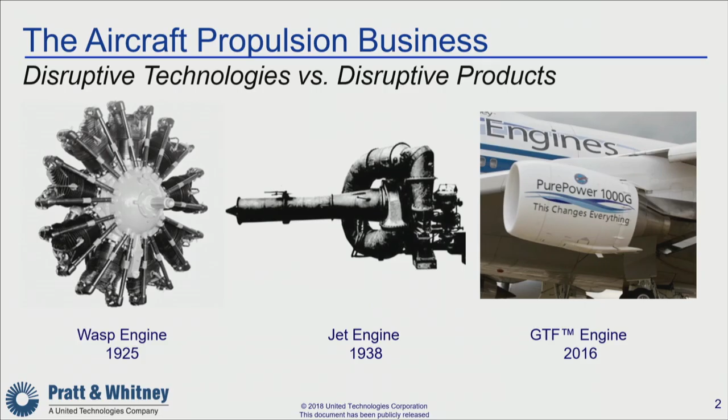This is Whittle's jet engine in '38, and von Ohain's in Germany - those are disruptive technologies that basically disrupted the piston engine business over the following 10 and 15 years. Most recently, the Pratt & Whitney family of geared turbofans has some new technologies in it, but it's a disruptive product in that it forced the industry and the competitors to come out with new products that answered to this.

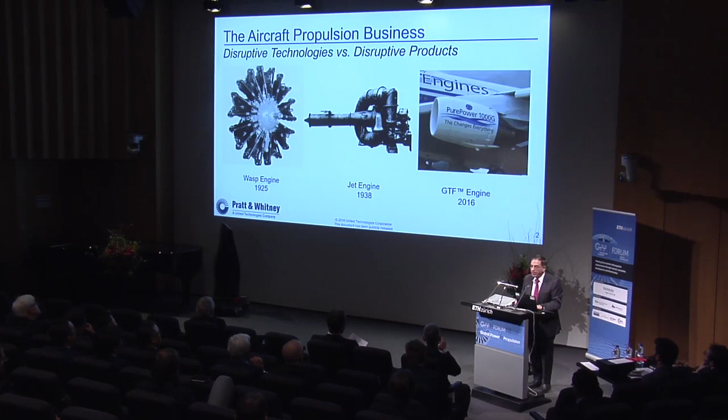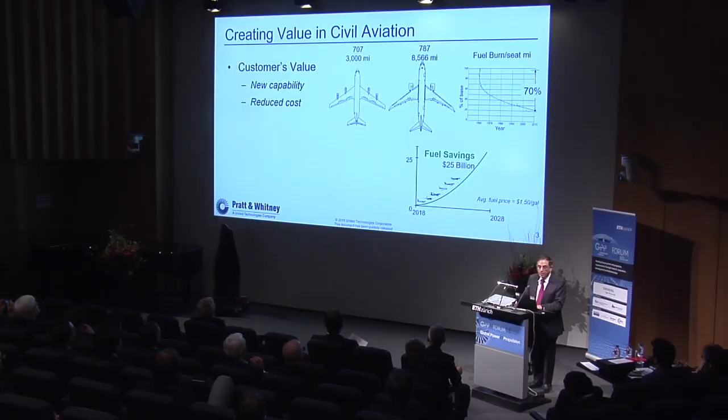And of course what it's all about is trying to create value. In aviation, there's my customer's value, which would be the airline or the airplane manufacturer. Here are two airplanes, the 707, the first successful commercial jet, and a newer one, the 787. If you're not an aviation person, they sort of look the same from the top - just a couple, one has two engines, one has four. But one is 70% more efficient per passenger kilometer than the other.

That's the result of enormous technology investments over 50 years, and new capability too. There's a lot of capability in the fact that I live in Boston and can fly Boston to Peking, Beijing, or Shanghai, now direct, nonstop, where we couldn't before - so that opens up new areas. And the fuel economy of things like the geared turbofan is worth about $25 billion to the world's airlines in reduced cost over the next decade. So it's been very successful.

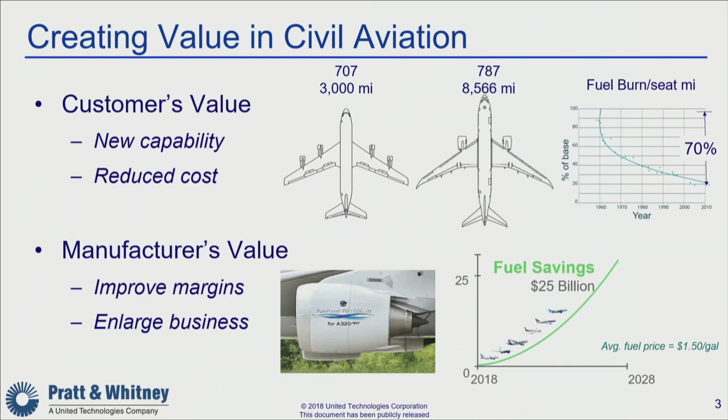But from the point of view of my management, they don't care about that stuff. They want to improve margins for their investors, or they want to enlarge the business. It's really no different than any other business. So let's first consider how peculiar the commercial airplane engine business and airplane engine business is.

Consider it's an extremely long-term business. We talked about infrastructure, which is there for many decades - aviation engines are also there for many decades. The J-57 started development in 1949, went into service in '54, and it's still in service 70 years later. It will be in service for another 10 or 20 years, generating revenue during that period.

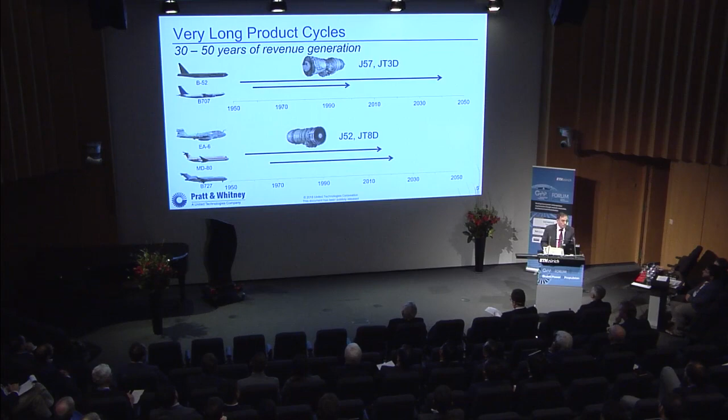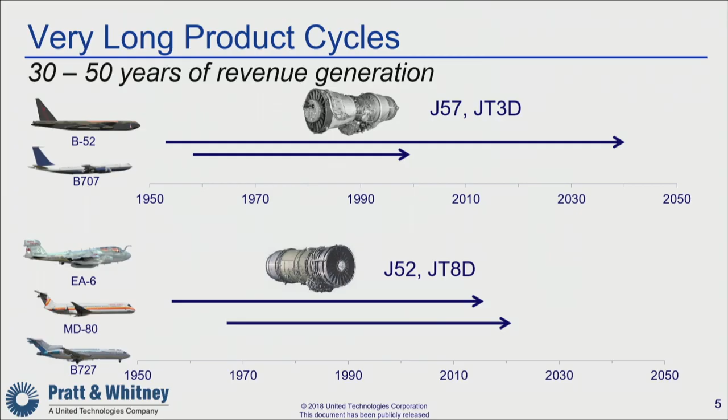Another engine was the J-52, which became the JT-8D, originally for a missile in the '50s, then a fighter plane, then the 727s and MD-80s. There are still a couple of thousand of them flying many years later, generating revenue. In fact, close to 40 years after they were introduced, at the turn of the century, those particular engines were the largest revenue stream in commercial engine aviation. So these are very long-term investments if they're successful. If they're less successful, they disappear, and we pretend they weren't there to begin with.

Engines have public list prices published by asset managers and leasing companies. They're basically commodities sold per pound of thrust. $200 to $300 per pound of thrust is a typical price for an airline engine.

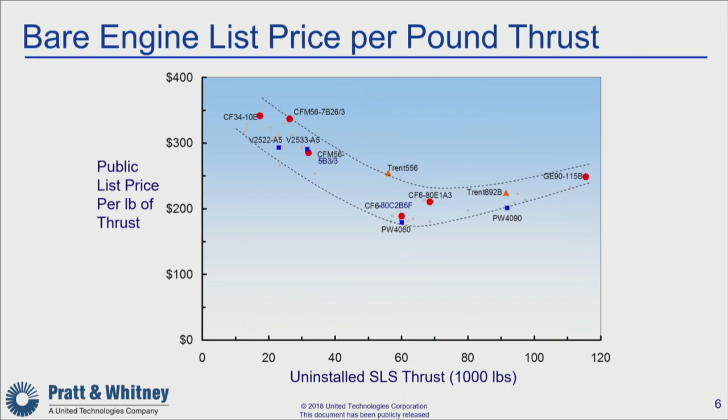We can go over why the curve looks like it does, but that's a constraint. Airplanes are sold per pound of capacity, gross takeoff weight, as certified.

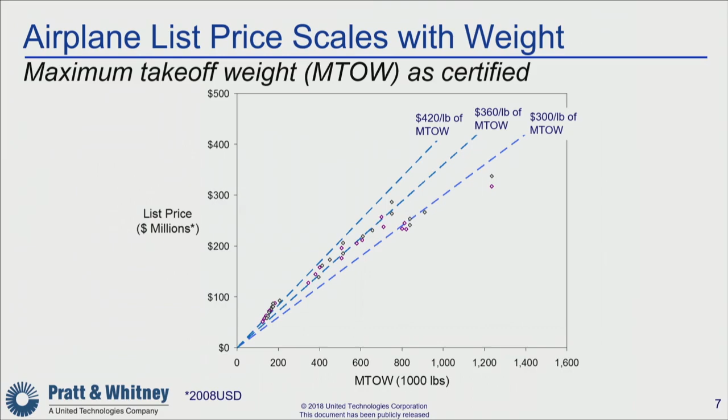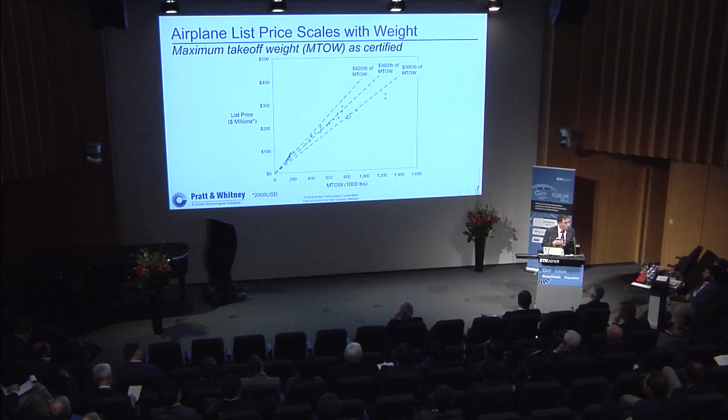If you want an airplane with less gross takeoff weight than it can deliver, the airframer will sell that to you at a reduced price and give you a certificate that says you can only operate that as a reduced takeoff weight airplane, and we'll sell you engines at reduced takeoff thrust, certified for that reduced takeoff thrust. If a later purchaser wants to buy that airplane and increase the takeoff thrust or increase the gross weight, they actually have to go and pay the engine company and the airframer to do that. In the old days, it was putting a plug in to tell the engine that it was now more beefy. These days, it's a software download, but it's connecting value to money.

Now, if I plot these two together, the vertical axis is the list price of the engines, the airplane list price is horizontal, and yes, they're both sold at discounts, but the ratios are about right. What you see is the engines are about 20%, 18 to 20% of the value of the airframe.

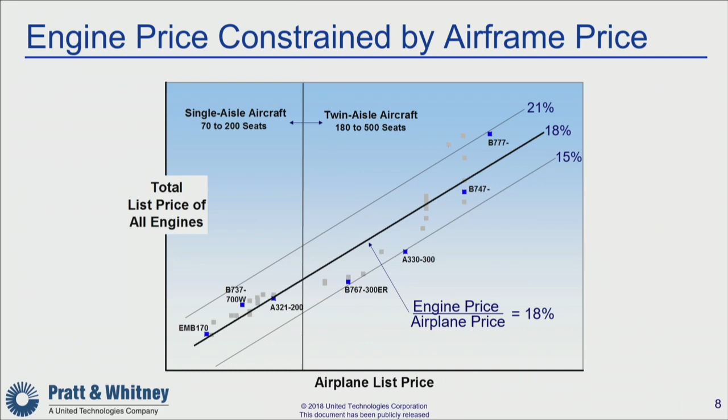That's a constraint, because what I find is my airframe customers don't want to pay me any more for my engines. They're basically saying they're willing to let on the order of 20% of the value go to the propulsion provider. If they can negotiate me down to 18 or 17%, they got a great deal. If I can negotiate them up to 22%, I got a great deal. But that's the business part of it.

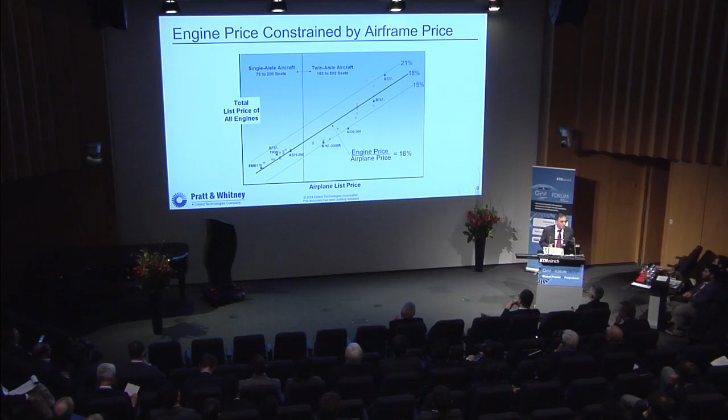It's a key point, because what it says is, as we develop new technologies, they can't add to the cost of the product. So for every new technology that adds cost, I need a technology that takes cost out, because I can't sell the engine for any larger fraction of the airplane.

Now, for narrow-body airplanes, since the 727 in the early 60s, the cost of operating the airplane in corrected dollars has actually come back down by 40%. That's the value generated by the design technologies for the engine, airframe, avionics, as well as manufacturing technologies.

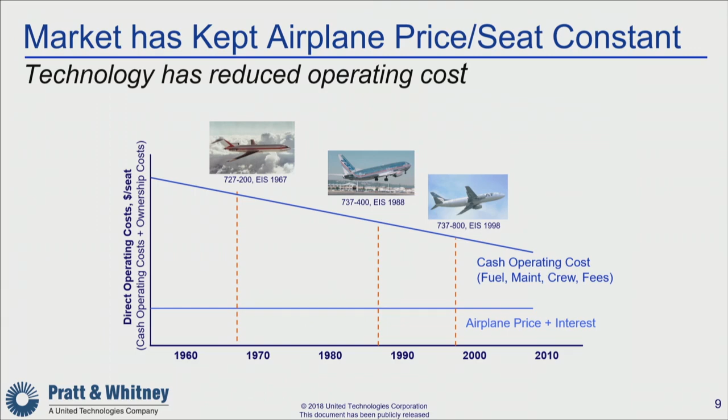Now, that's the good part. The bad part for manufacturers, the selling price hasn't budged. So it's much less expensive to operate for the airlines. We're not generating any more revenue for the manufacturers.

What's going on is, the airlines weren't generating large profits either for many decades. They were giving it away to their passengers, so airfares dropped by an order of magnitude since 1960. And so we took it out by growing the size of the market enormously, and it's continuing to grow at about 5% a year.

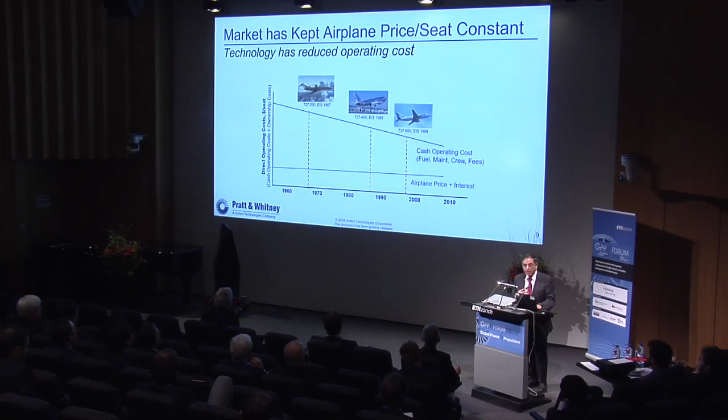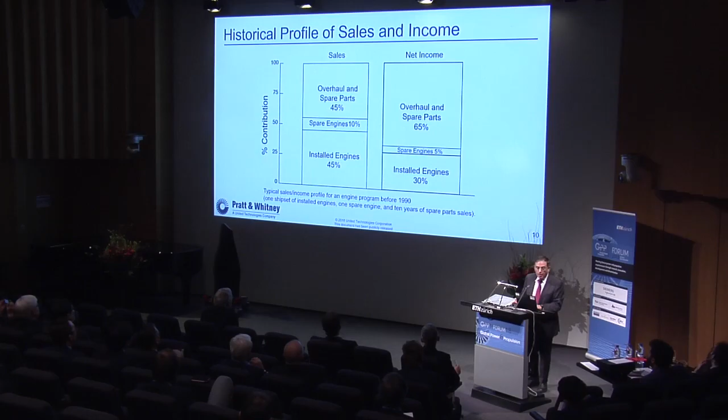But that still doesn't address my business concern of how do I increase the returns and the margins in what I do. Historically, say before 1990 certainly, the business selling commercial jet engines was about half the engines went as new engines on new airplanes—45%, 10% were spares, and overhaul and selling spare parts was 45%. So it's about equal, installed engines on airplanes and overhaul.

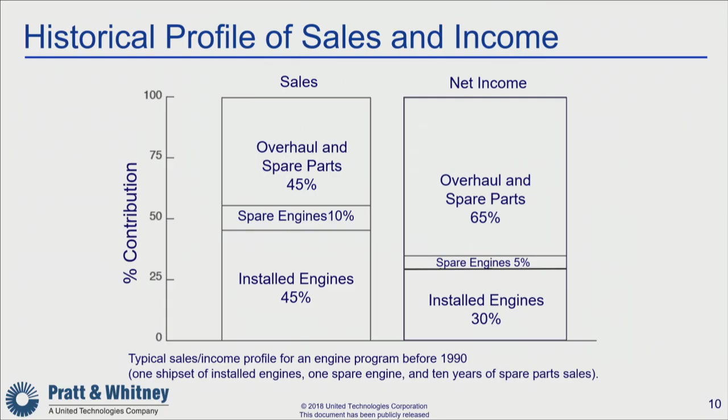But the net income was much more profitable to overhaul and provide spares than it was to do installed engines. That was prior to, say, 1990.

Now, it's changed quite a bit. We make no money selling engines. Actually, on a good year, we make no money selling engines. All of the net revenue comes from overhaul and spare parts, which has a profound effect on how you think about new engines.

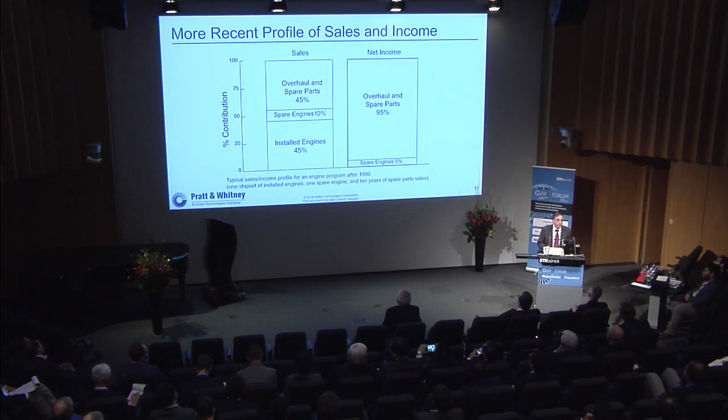In the good old days, here's what an engine development looked like. If I had to go to my banker and borrow money to invest in the engine, I'd ask for about $1 billion for a small engine, for engineering development over the course of 5 years. And then, because the first engines are usually very expensive to make, we haven't learned how to do it yet, we're losing some money further on, but then we start making money both on engine sales, and then as the engines come back for spares, we make more and more.

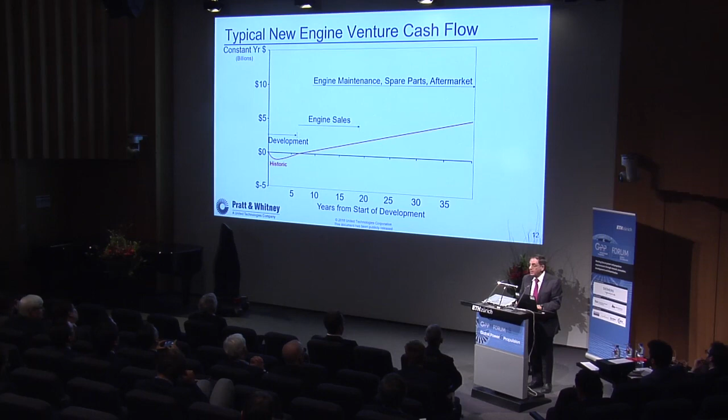And you could argue over the shape of those curves. Some of them go up almost exponentially. Some of them abruptly die. That was the old days.

Now it looks more like this, because we're not making money on selling the engines. We're putting billions of dollars into engineering development. We're putting billions of dollars into capital. We're putting billions of dollars into early sales concessions versus the manufacturing cost. We lose money for about 25 years.

Now, I see our investor here has a very sick look on his face.

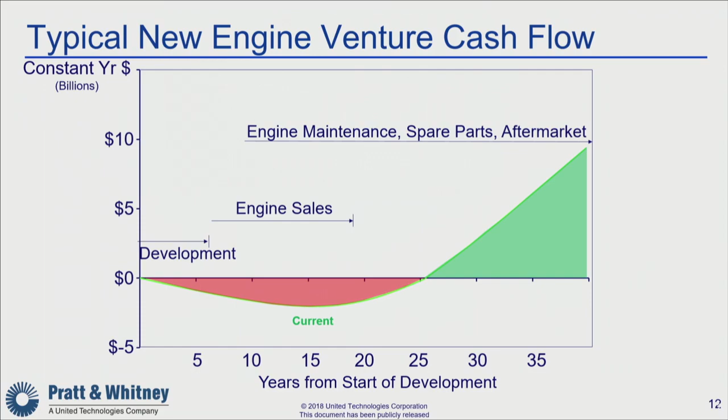For our newest engines, the official number from our CEO is we're down 11 billion, but then it goes very positive indeed. So investors really like the green, but not so pleased with the red. What's been happening is the red's been getting bigger and deeper as time's gone on over the last 20 years, and people are starting to ask, do I really want to invest in this business, and how do I change this investment strategy? Because even for the die-hard older academics here, if I gave you 11 billion dollars to invest up front, you might find better paybacks than 25 years.

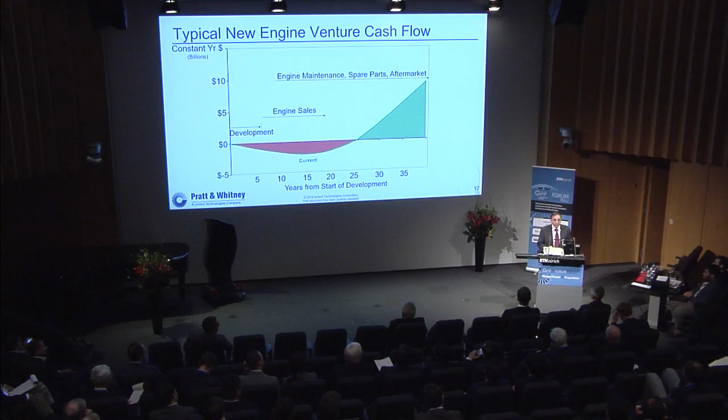So we're looking for things that are new, we're looking for things that are innovative, we're looking for disruption. But we also have to be mindful of evolution.

A technical meeting like this, we talk about technical stuff. Here's an excerpt from the Mechanical Engineering magazine in 1945 on the jet engine, and they talk about all the interesting things they have to work on: high-temperature alloys, high-speed bearings and bearing resonances, distortions due to temperature, compressor and turbine designs, aerodynamics, structures. Funny that those are all the things we work on still today, and those are, to a large degree, how we've gotten the 50% improvement in engine fuel burn over this period.

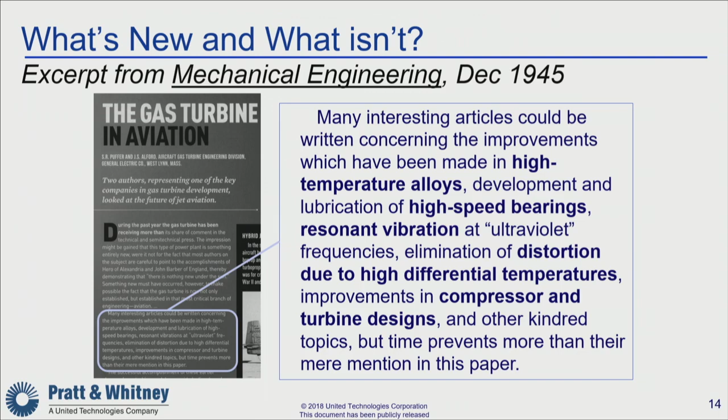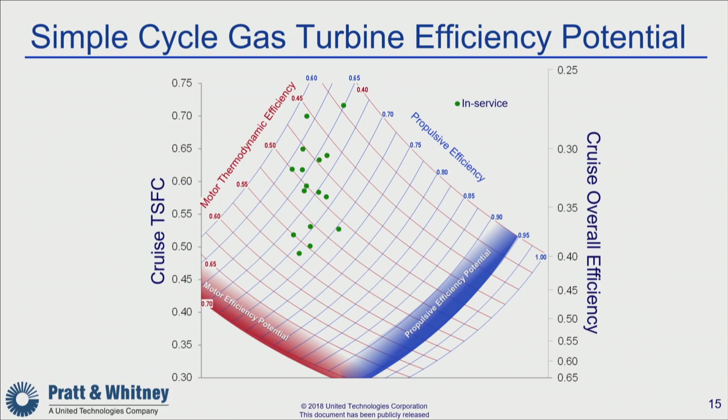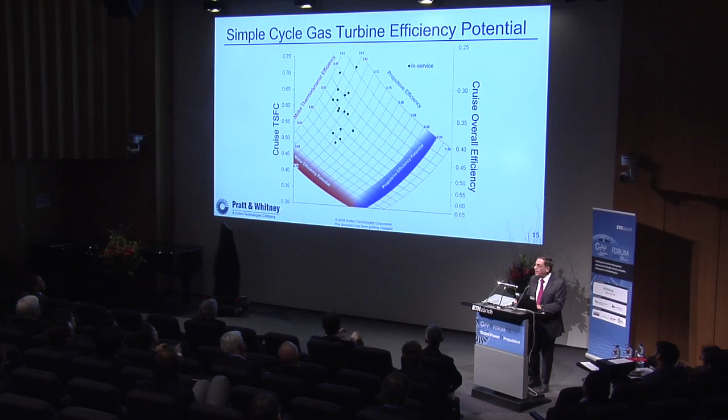Historically, we know we're working to reduce fuel burn. The 707 was about 20% overall efficiency, the newest engines are a little over 40, and we think the ultimate is on the order of 60 or so. So there's as much headroom to improve engines as there has been in their total development. That's one evolutionary factor, perhaps, although we may need innovation, certainly need innovation to get there.

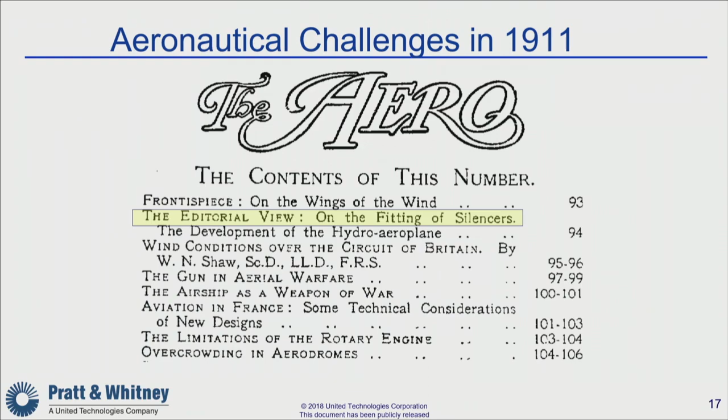Here's a British magazine from 1911, with an article on the fitting of silencers to airplanes, stating they think the racket doth prejudice the public against us. I flew through Heathrow yesterday, and we know they're still holding that grudge from 1911 in terms of the British aeropress. So for the history of jet engines, we've worked hard to reduce the noise.

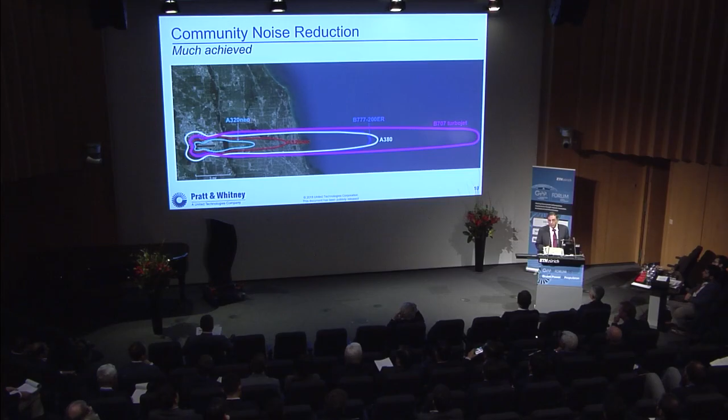I was just talking to the noise group at O'Hare. They got 224,000 noise complaints in the last quarter of last year, because it's now all automated. So we still haven't quite solved that problem.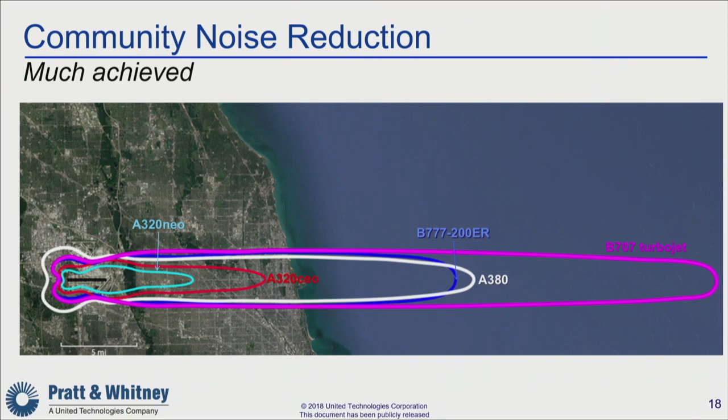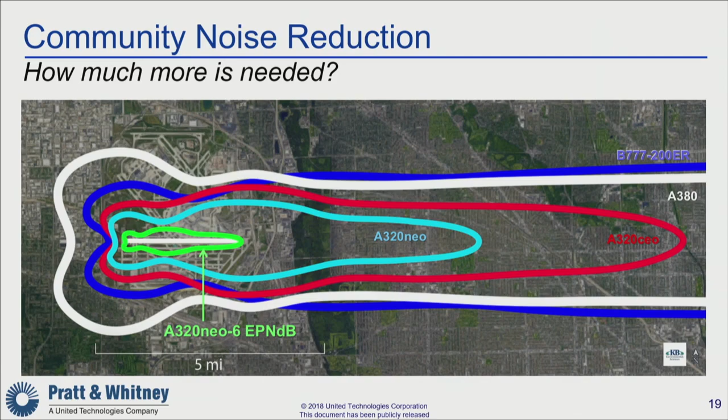You could ask from an engineering point of view, how quiet do you have to be? We've done that calculation. If you can take 6 EPNdB off that class of airplanes, you can keep the 75 dB noise contours over the runway. Now, 6 dB, as you know, is a factor of 2 in noise. It's a very non-trivial number, which you'll probably never get from an existing design, but it's not the numbers I'm used to thinking about, 30, 40 dB.

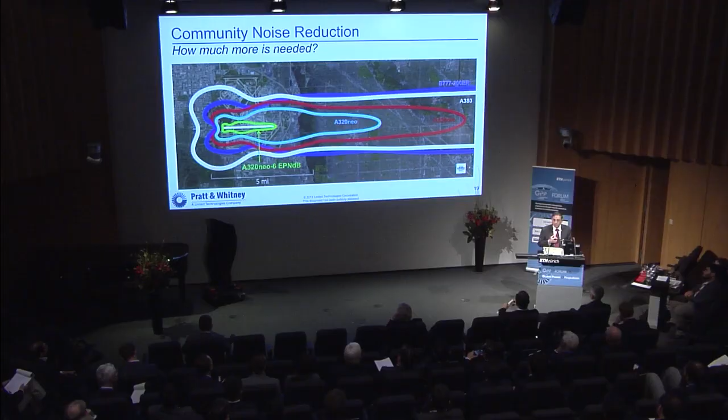It's also, for the Neo, the engines are only a dB quieter than the airframe on takeoff. So you quiet the engines, you still have to work on the airframe, but that's not my problem. That's the airframers' guys. They will no longer be able to submarine behind the engine people on noise complaints.

And indeed, in an evolutionary sense, at Pratt we're working on advanced propulsors that have much lower noise and much lower fuel burn, suitable, say, for a 2030 airplane. There's one at a NASA rig, same one on a full-scale engine. Of course, the development for the technology has to precede by 5 years the engine development we do.

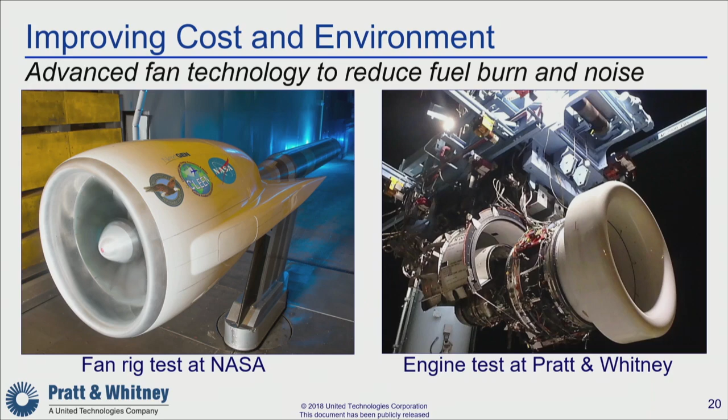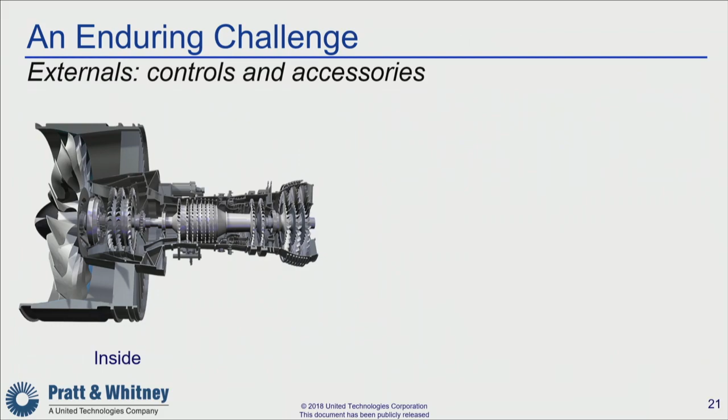One thing we don't talk about in meetings like this is controls and accessories. This is the picture of the inside of a jet engine, very familiar to you all, with blades and combustors and discs and all that good stuff. But the outside of the engine is festooned with controls and accessories.

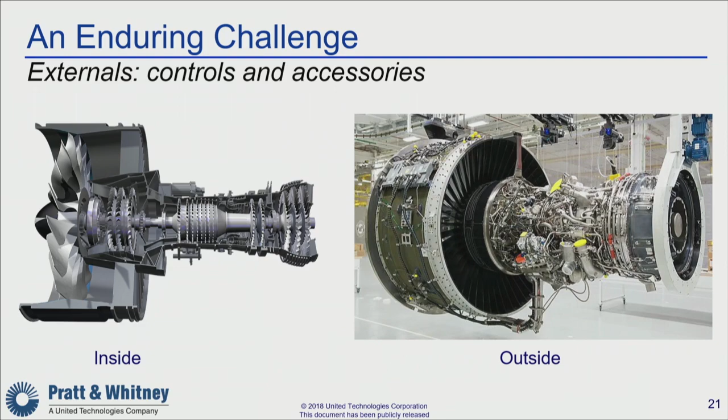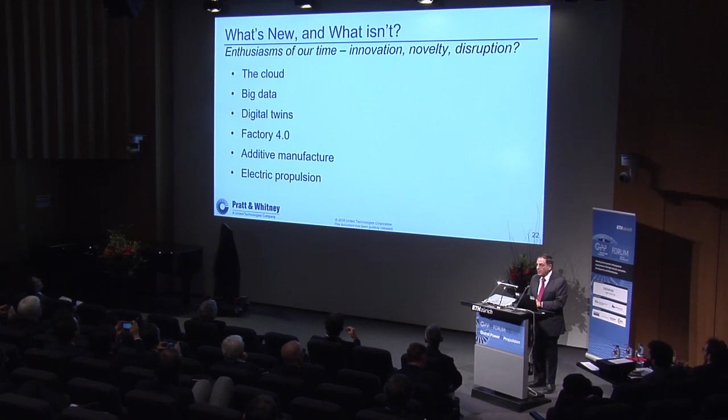So the enthusiasms of our time, I get clippings from our CFO and chairman on what are we doing on the cloud, big data, digital twins, factory 4.0, additive manufacture, electric propulsion. And since they control the money, you actually have to answer them.

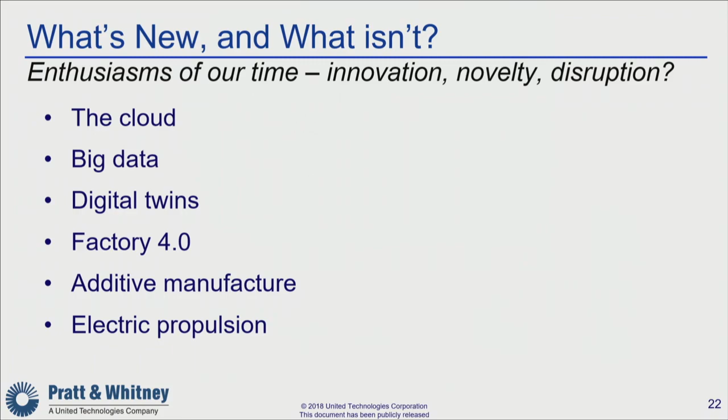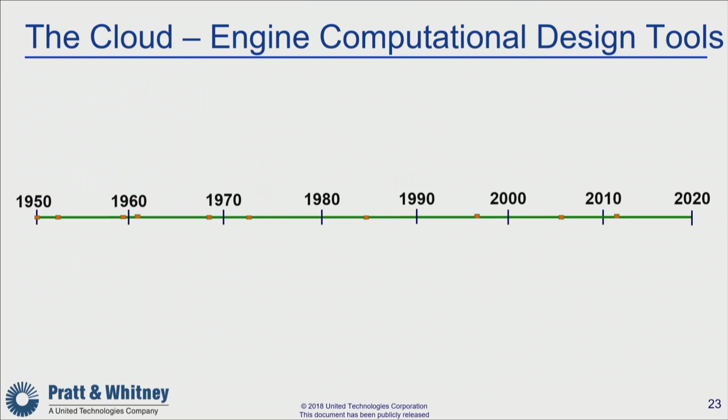Let's talk about the cloud in the sense of engine computational design tools, a topic that many in this audience are extremely expert in. In 1950, that J57 was designed with slide rules and mechanical calculators.

In 1960, the J58, the engine on the SR-71, was still designed with slide rules, although we had tube computers then, which filled large spaces. Some of them we still have.

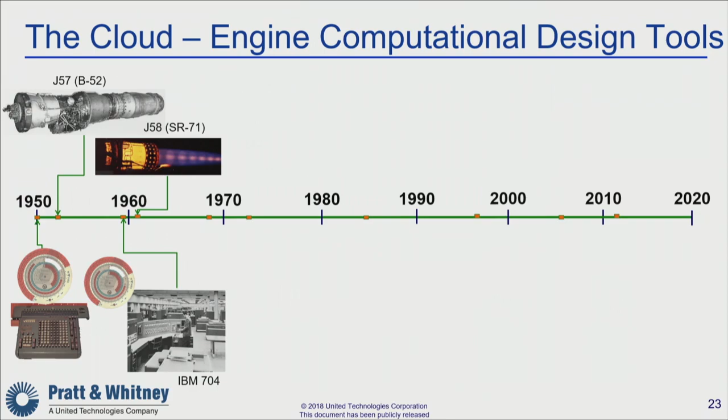Go forward a decade, and we had the IBM 360-65, which some of us went to school on, and that was used to design the first F-15, F-16 engines.

By the middle 80s, we'd gone to a Cray, and that $32 million Cray was Pratt & Whitney Engineering's pride and joy. People just used to look and admire it, much less finagle how to get computer time on it. And that designed a much-improved engine.

My iPhone has 100 times the computer power of the Cray XMP, by the way. It doesn't cost $32 million, although Apple's certainly making a fortune much greater than that than Cray ever did, so there's a message there perhaps.

F-22 engine, the F-119, Crays weren't enough. We used 1,000 workstations networked together.

That latest airplane is the F-135, the F-35 engine, F-135. That was designed with a cluster, a cluster with tens of thousands of nodes in it, growing all the time, still growing all the time.

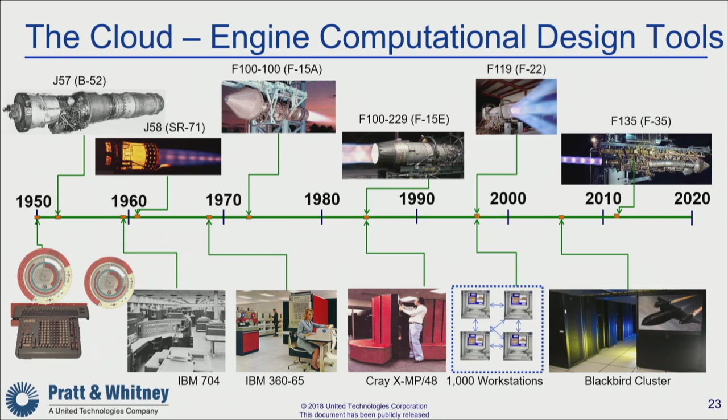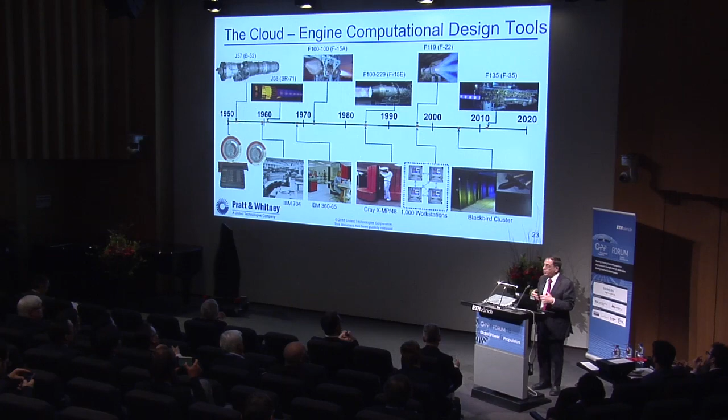In the midst of product development, if we run into, as a professor I'd call it a problem, but here I'll call it a challenge or an opportunity. We have 2,000 engineers working on this project. We have commitments to customers. We want to get it solved ASAP. We're willing to pay almost anything for computer time if the computer calculations will help us move forward.

And so having that expandable capability in a big cloud, which means you need the codes that can do that as well, it has a lot to contribute.

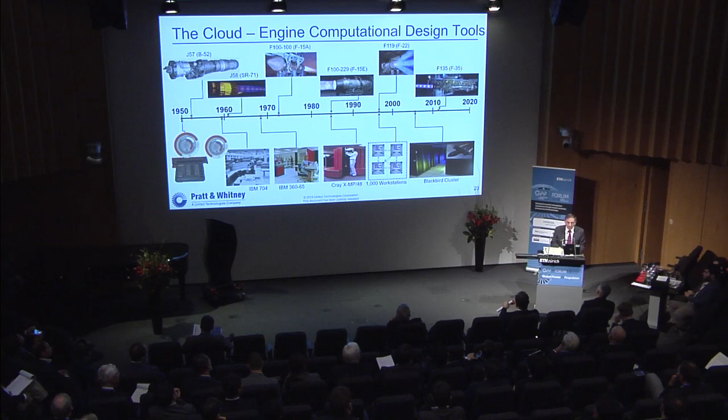Now, this isn't designing the product. We make our money out of engine maintenance.

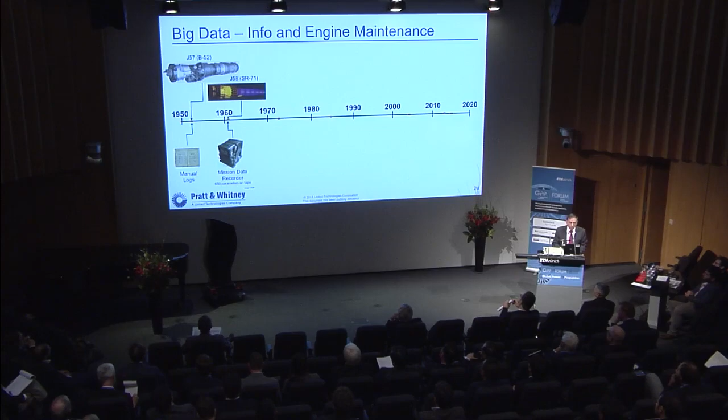So if we go back to that J57, the information for maintenance were handwritten logs. You move forward to the J58 on the SR-71, it had a digital and analog mission recorder that recorded 600 parameters. An astonishing thing for a development that started in 1958.

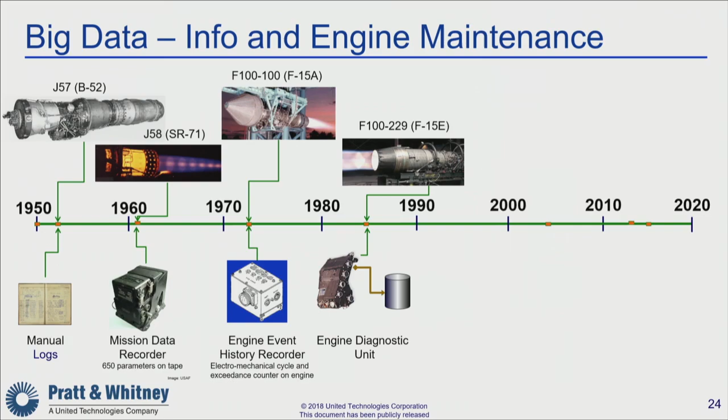However, back to the F-100, that was really mechanical. By the time we got to the 229, now we had a digital computer on board to record the diagnostic units. And these are different than the engine control computers.

And that's because it's very hard to change engine control computer software because it's safety critical. It's much more economical to put it in a separate machine.

The F-119 has 2, and the F-135 also has 2, and it has more computer power in the diagnostic units than it does in the engine control computers that run full state models of the engine all the time.

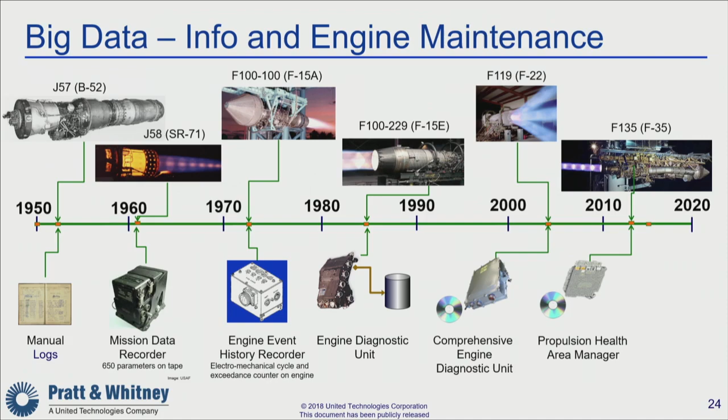And there's something called EFAST. EFAST is a box that now goes on commercial airplanes. It monitors thousands of engine parameters 10 times a second over the entire flight.

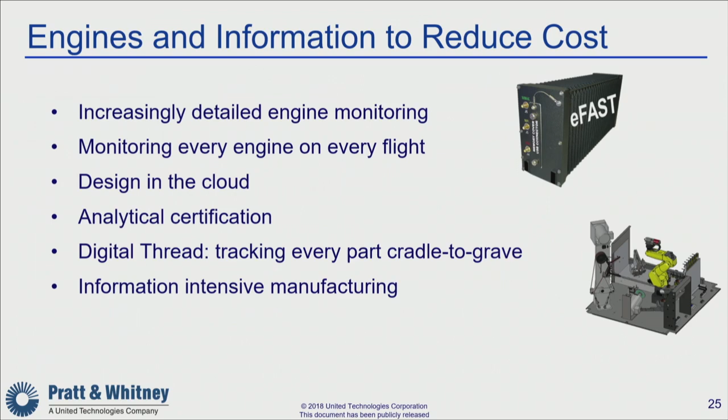And when the airplane lands, it has a cell phone on it. It calls home and downloads the data. Now, you don't do that on a military airplane because you want a secure link, you want to plug things in. But the point is, we're now bringing in an enormous amount of data compared to where we did.

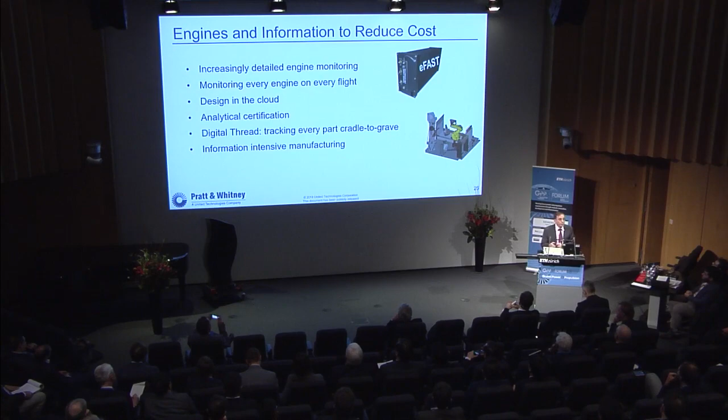We monitor it on every flight. We're moving towards analytical certification. And the other part of the digital thread is measuring all of the parts as they're made and keeping track of which part is in which engine to know how to solve problems.

So, Factory 4.0, what are we doing at Factory 4.0? Well, actually, Pratt & Whitney is a machine tool manufacturer from the 1850s who happened to have some extra machine tools and some empty factory space and agreed to invest in this airplane engine company if it took its name, also used its machine tools and space. That's how the name Pratt & Whitney came about.

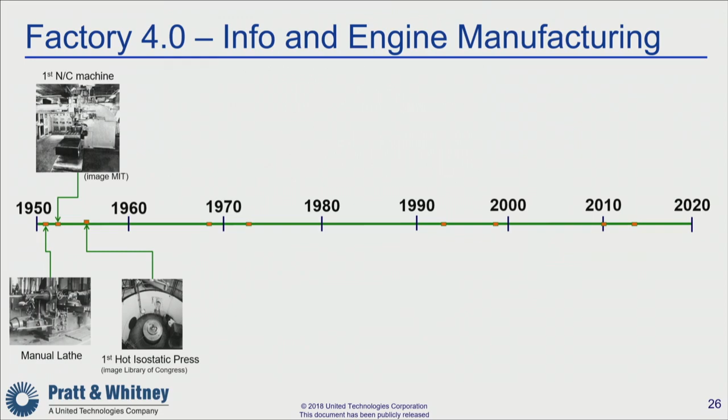Pratt & Whitney still makes machine tools, but the company split in 1930. Numerical machining started in the mid-50s, used on gas turbines. Hot isostatic pressing, which is the heart of disks in modern turbines, also 1950s. Numerical tape machines, late 60s, CNC tape machines, 5-axis mills in the early 90s. All of these are connected, whether the connection in the 50s was bringing tapes to the machine, now on a network.

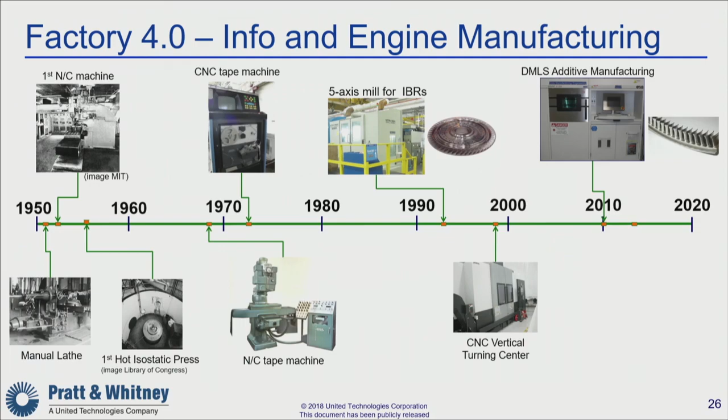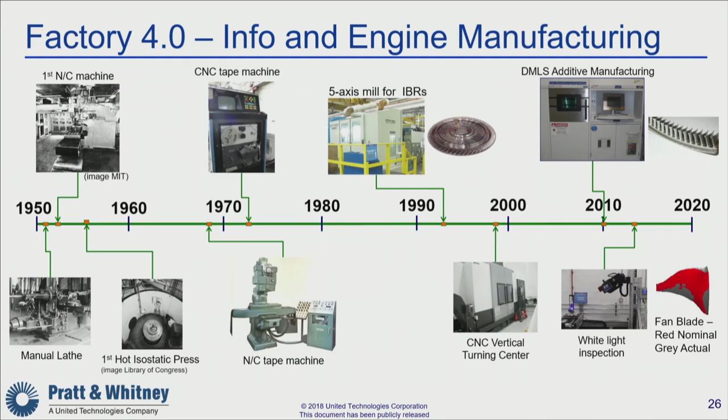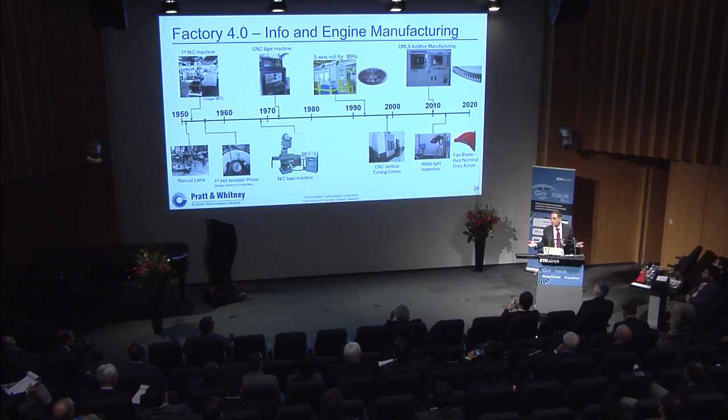Vertical turning mills, additive manufacture came at the beginning of this decade for metals, earlier for plastics, and white light inspection. The point is, since we're extremely constrained in the selling price, we're extremely concerned in the manufacturing cost. And what we don't have generally are big conferences on technologies for manufacturing advanced jet engine parts.

And the reason is that's too dear to share with people. We share it with partners, but because that's part of the heart of the technology. Now, you could argue that this is all evolutionary. Where does it become disruptive? The aftermarket business is really important to us.

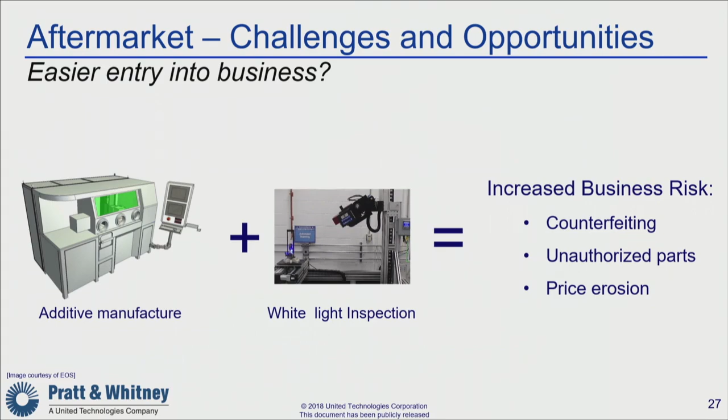If you have 3D printing, then you can make parts that look like other things. You also have white light inspection, which means you can very quickly and accurately determine the shape of a part. And so this brings up a business risk to us: people counterfeiting parts, people making unauthorized parts, new people getting into the business and forcing price erosion. That would be disruption.

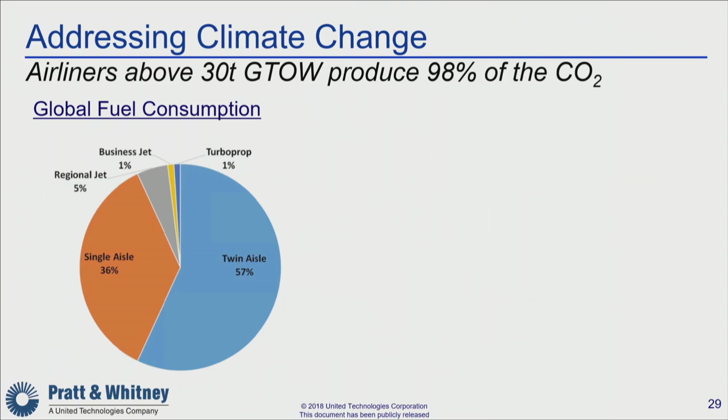One last topic. I am very concerned in my job about climate change and aviation's response to it. 98% of aviation CO2 comes from airliners above about 30 tons, call it 70 seats and above, roughly. That implies enormous powers and energy.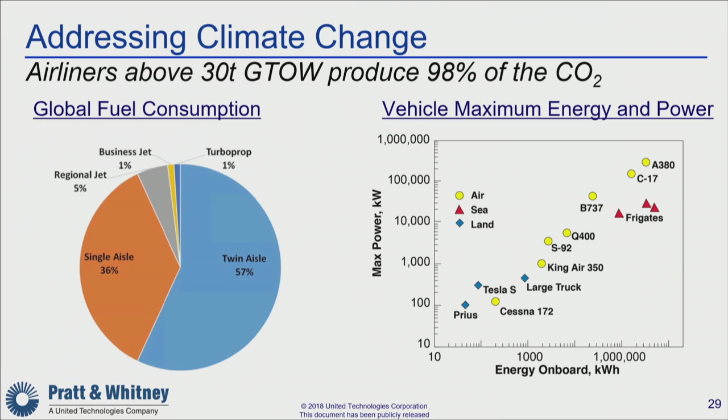So there's a lot of talk about electric propulsion. Will it be real? In order to be real, it has to be able to handle the A380's 300 megawatts of takeoff power. It's a large power plant. It has more energy on board than a naval warship. So you need engineering solutions in that class. Let's say people come up with them. Whether they will or not is a different discussion.

Here's the thermodynamic efficiency of aircraft engines at cruise. This is the efficiency from the fuel in to the shaft that turns the propeller or fan, conceptually what could be replaced by an electric motor. Given the fact we know the fuel, we know the efficiency, we can calculate how much CO2 comes out, which is on the right, so that's CO2 in grams per kilowatt hour.

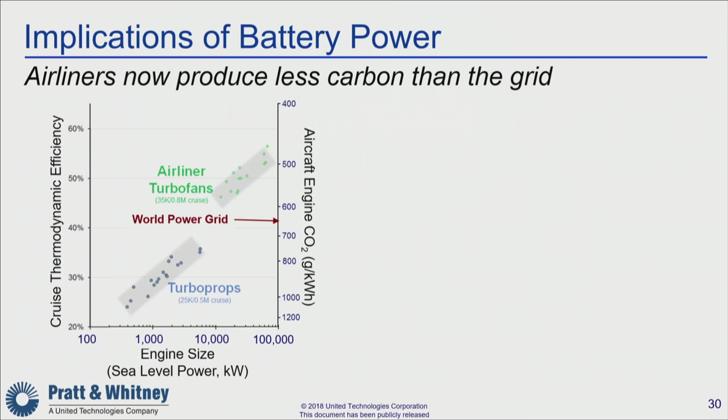The world's power grid is there. So in other words, the world's power grid is less efficient than the world's airplane engines. And that's because the best airplane engines are more efficient than the best combined cycle power plants, at cruise. And the average aircraft engine is much better than the average power plant at cruise, even putting in where we currently are with renewables.

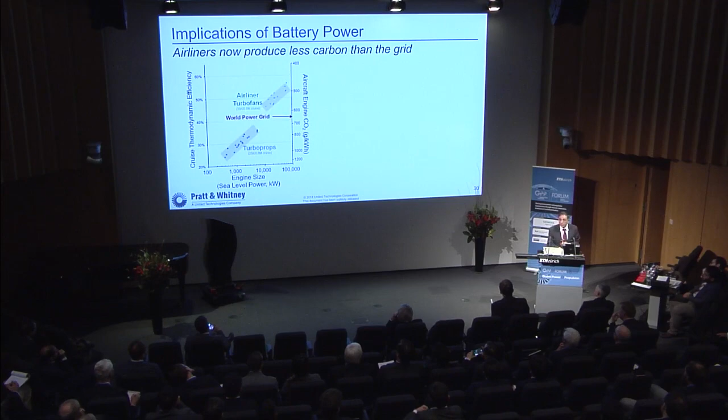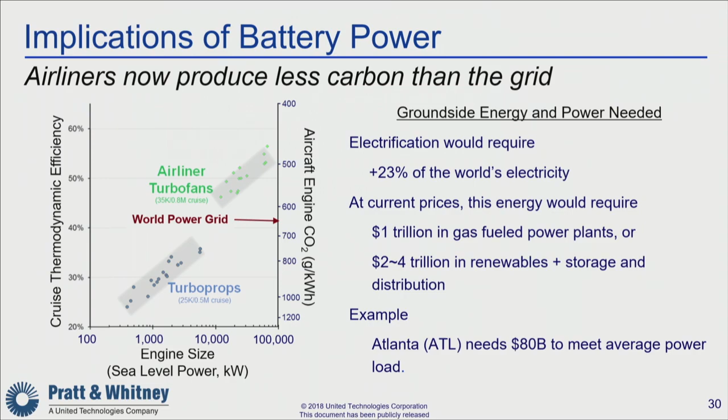So if you could make battery-powered airliners to the point of climate warming, you don't want to. If you had to, or if you could, then you'd need 23% more electricity, a boon to investors perhaps. Under current prices, that's about $1 trillion in gas-fueled power plants, 2 to 4 trillion using renewables and distribution. And if that's energy, if you think of power, Atlanta needs about an $80 billion investment to meet the flights per hour through it. So it's a major change to the world's infrastructure should that happen.

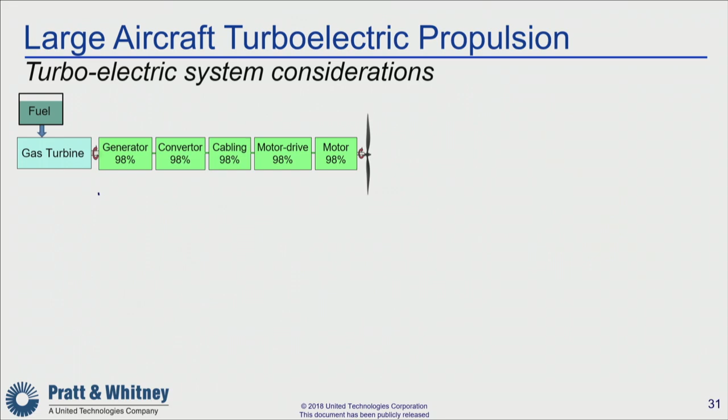People talk turboelectric. You take a gas turbine, you put a generator, cabling, motor drives, whatever. I love this—UTC makes all of this stuff. And so it's even more stuff to sell to the airframer. The net efficiency in the future is probably about 90%. It's now about 80%, but people talk about going up to 90%. So you'd lose 10% in propulsive efficiency.

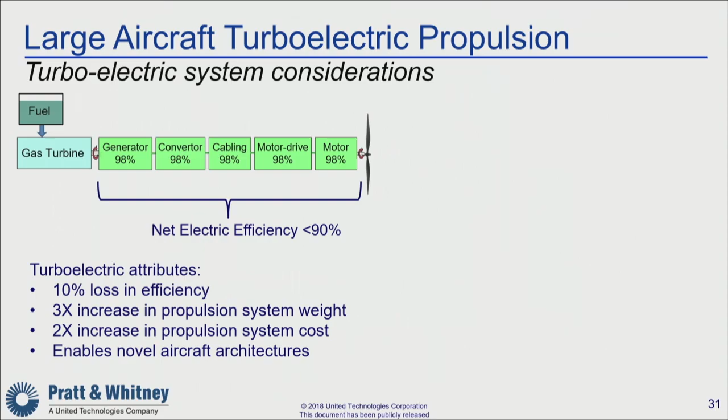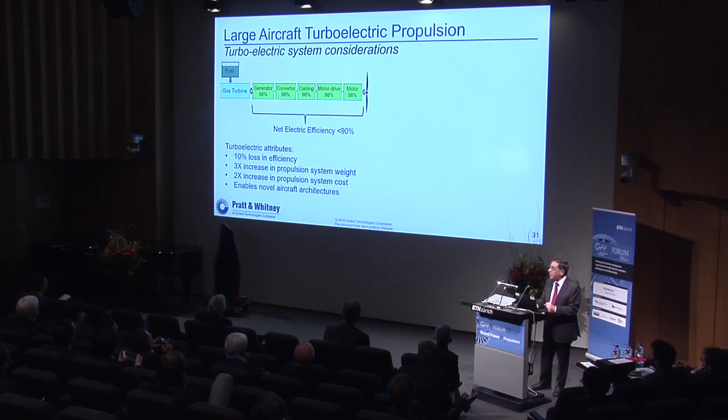The weight ambitiously is about 3 times heavier than just the gas turbine. A 2x increase in cost, which presumably then gets passed as cost to the manufacturer. Turns out the electrical equipment costs the same per kilowatt as the gas turbine now. But people say it enables novel aircraft architectures.

So going back to an investor, how much reduction in operating costs do I need for the investment to pay for itself? That is with a 2x increase in the propulsion system cost to the airframer. The current discount rate, which is about 7% for airlines, it's a little over 40% at today's fuel price.

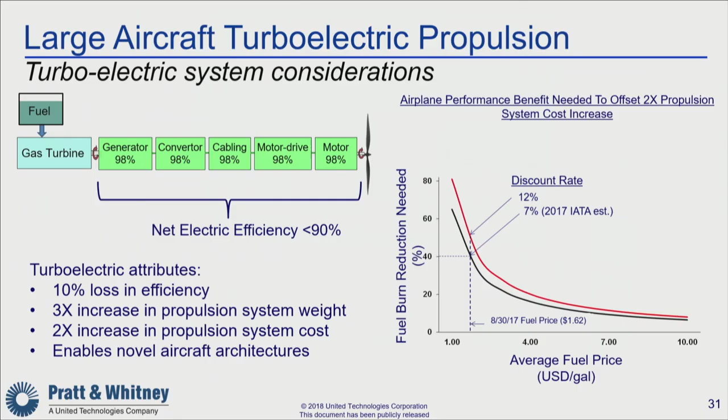Fuel goes up to $4 a gallon, it has to be about 18, 19%. Think of that as the engineering requirements—the financial requirements flow down to the engineering requirements as to whether that innovation can do something.

Last point—that's taking airliners, doing airliners. I can't build flying cars now. One reason is I didn't have command and control, but you can see how autonomy solves that. The other is I didn't have dependable, low-cost propulsion. Gas turbines are by far dependable enough, but they never get down into this size range while being affordable. So electric propulsion there may indeed be the enabling technology for flying cars and taxis and such things.

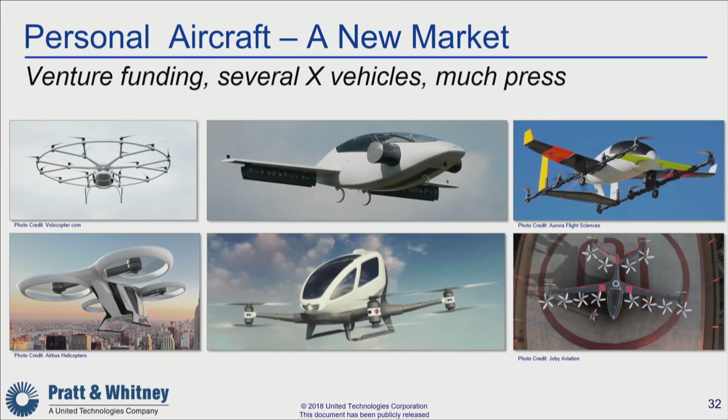That would be disruptive to many industries. It's not disruptive to the gas turbine industry. It's an expansion of the industry in that sense.

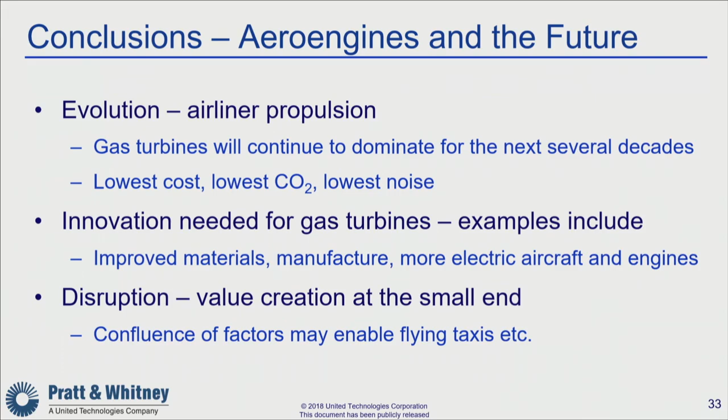So let me conclude by saying airliner propulsion—it's pretty clear to me that gas turbines are going to dominate for the next several decades. They're the lowest cost, lowest CO2, lowest noise solution. Innovation is needed for gas turbines all over the place: improved materials, manufacture, perhaps more electric aircraft and engines, and disruption, certainly at the small end. Value creation in things like enabling flying taxis. So thank you.